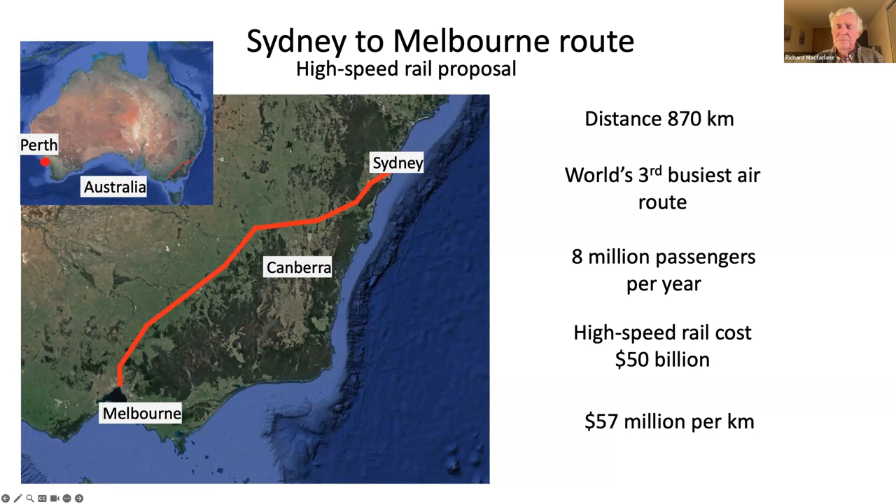And there have been a number of studies on this, and the high-speed rail cost is maybe 50 billion or 100 billion or something, but if we say 50 billion, that comes out at $57 million per kilometer for the route. And it's not a very challenging route. It's relatively flat; there's a few hills, but nothing too much. It's certainly been talked about a lot for high-speed rail, and I think it's a good candidate for Hyperloop. So for Hyperloop to be successful, it really has to be competitive with high-speed rail, or it will never be built.

High-speed rail, since Hyperloop's been announced, they built maybe 20,000 kilometers of high-speed rail. So that's the sort of standard. And look, I've been in design projects all my life, but everything that I ever worked on always had to have a place in the market. It had to have a market position, and it would ultimately sell. And that's what paid for the research.

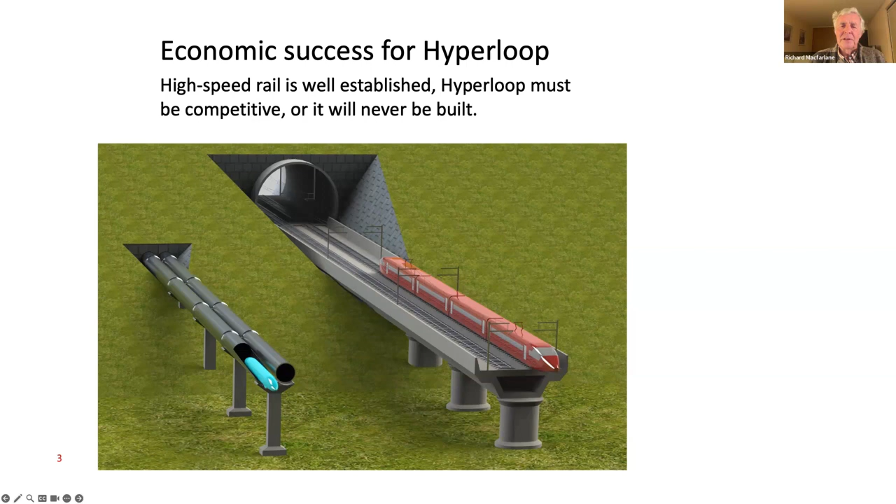And so my view of Hyperloop is that you've got to research towards the end product, which is a transportation system that will be built one day. So if we compare Hyperloop and high-speed rail, high-speed rail is an established technology, which is a real advantage. People know what it is, and it's popular, and it's compatible with existing lines and network. That's an advantage. And also with high-speed rail, it's very easy to have frequent stations, a lot of intermediate stations.

Hyperloop has the advantage, as we know, of very high speed and very low energy. So they're two big advantages. But the real question is the construction cost. And this is where we've really got to say, how can we build it in a way that's competitive with high-speed rail? And this affects every decision in the design process. And to me, it has to be the objective of the team, to say, how can we get this to work?

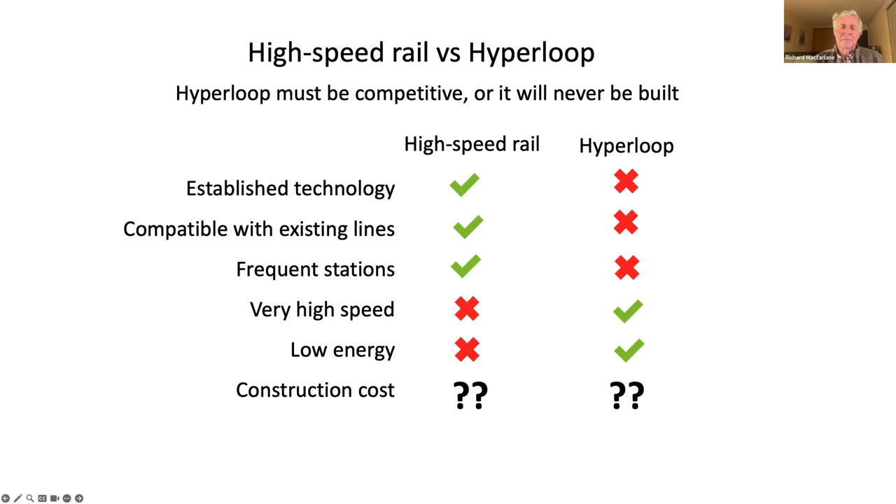So my proposal is a vacuum tube that's 2.8 meters inside, steel tube. The pod is 1.65 meters inside. That's about the same width as a minibus or a large car or a Learjet. And that's 3 seats side by side, rather more comfortable than the 3 seats you get in economy class in aircraft. So you get 27 seats in economy. And if people want to pay a bit more, you have 2 seats side by side, a bit more comfortable, and you get 18 seats in business class.

I think the speed has to be 600 kilometers an hour. And then, as you build up the technology, you'd be aiming for 1,000 kilometers an hour after a few years. And the vacuum, 10 millibar, I call it a 1% vacuum. So that's 1% of the air pressure, which is 99% less drag, which is pretty useful. So this is my concept for the pod.

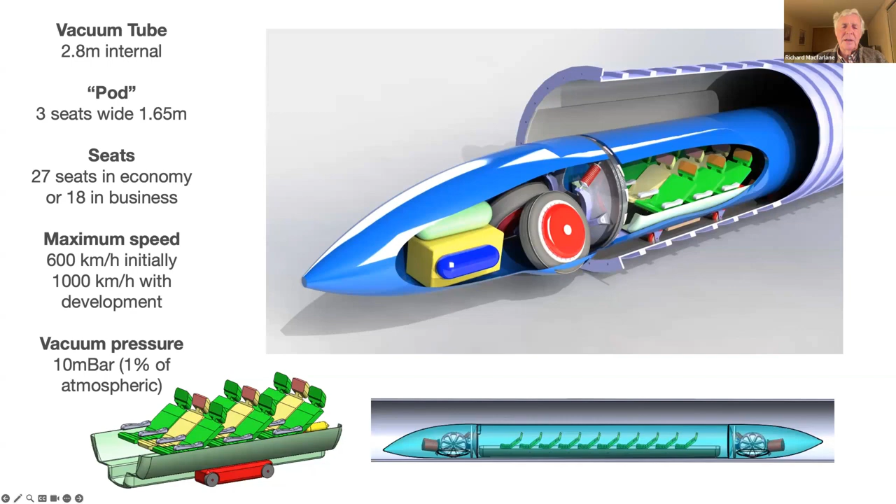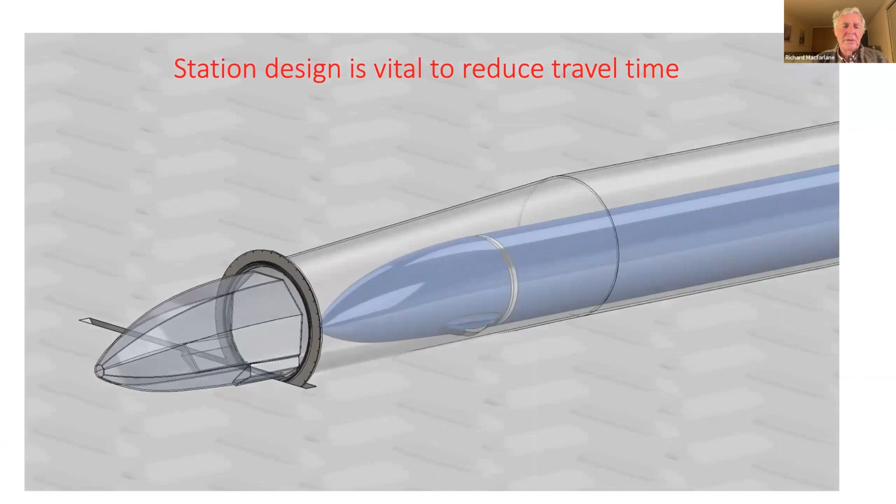And I'll just show you how the station works. The station's really important because we've got to have a quick turnaround. We've got to turn around the passengers really quickly, otherwise the service isn't really worthwhile. So the pod comes along inside the vacuum tube, and it goes up to the airlock there, and the airlock unscrews the power car and moves it over to one side. And then the seating module rolls out. And just notice that red thing is the clamp seal that clamps onto the pressure hull and then keeps the vacuum.

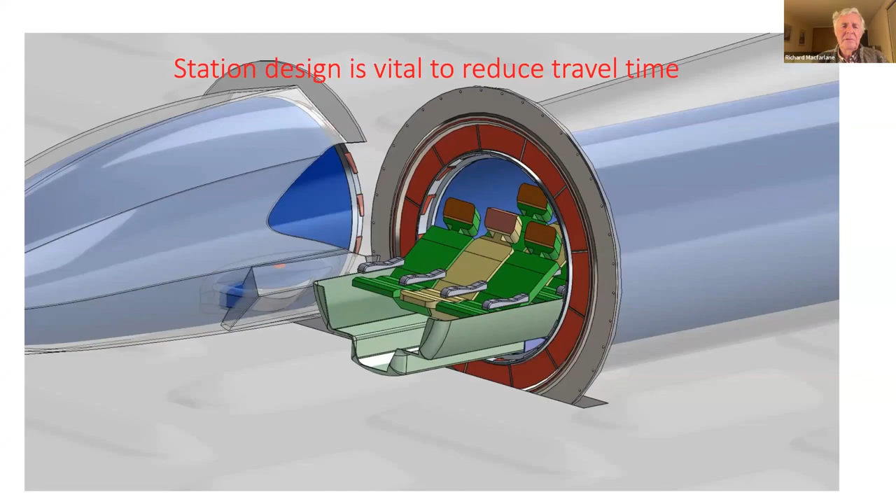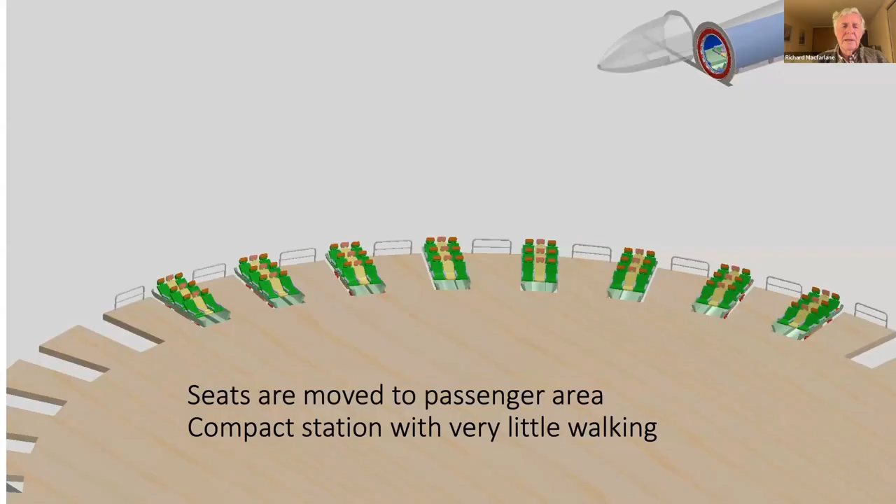And in this next one, we see how the seating modules roll out, and they're picked up by little autonomous trolleys that carry them over to the passenger area. And this next one here, there's a number of different ways of doing this. I've sort of shown it as a carousel. Basically, the seating modules come up to the passenger area, so the seats come to the passengers, so the passengers don't have to walk. And the passengers can then spend some time getting out of the seats and the new ones climbing in, but the pod actually turns around very quickly. So I think the total time for the pod would be about 1 minute at the airlock.

So it's interesting looking at this route here, 870 kilometers. The flight time is about the same as an aircraft, it's similar speed. But where we've really got to get the advantage is to get the station time down. I think including station time, we can probably do this trip in 70 minutes versus 3 hours for flying. And airports are terribly slow and they're generally a long way out of town. And I think high-speed rail would be about 3 hours as well, which means that in a way, it's hardly worth building high-speed rail because it's going to be no quicker than flying, you know?

But I think the objective of this is to combine the speed of an aircraft and the quick turnaround that you'd have at a metro station, like an underground station, where you're never more than a few minutes there. So I think this is the station that will work really well.

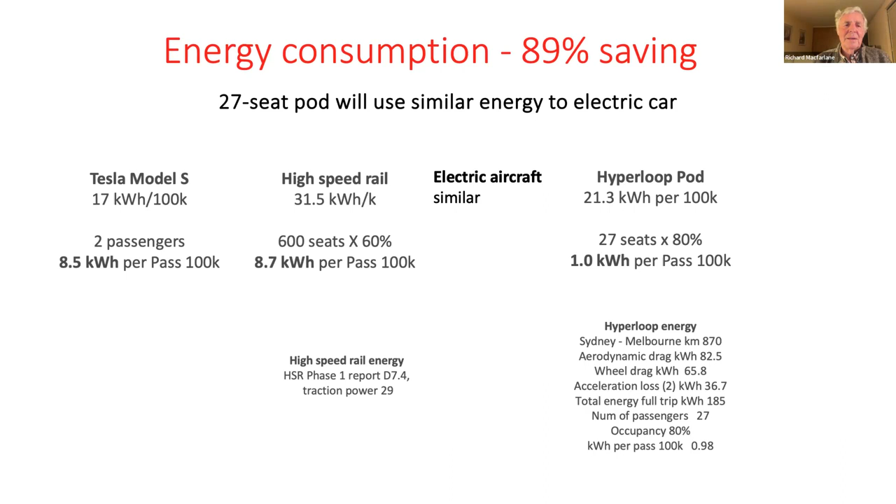And today's focus is all on energy and energy saving. So there's incredible savings from this, and it just shows the benefit of running in a vacuum. So now we get to the really important one. The difficult one is the construction cost.

We can see from this image here that the Hyperloop has to have these big, heavy steel tubes. But once you've paid for the tubes, and of course the tubes are a lot more expensive than the railway lines and things, once you have the tubes, it's really a much smaller project. And you can see that this is on flat land here.

And one of the big issues, and I think you mentioned it before, is landowner resistance or community resistance to a project. Nobody wants a high-speed rail going through their property or through their village. It's terribly noisy and dangerous. And the Hyperloop will be much, much more acceptable. It'll be completely safe and quiet and much easier to cross over or under it. So just on flat land, I think Hyperloop maybe has got an advantage.

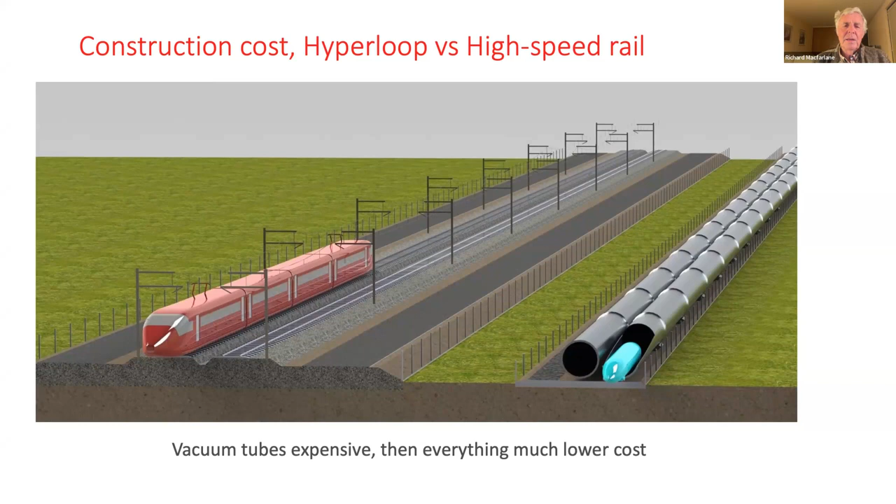But now we look at tunnels, and tunnels are incredibly expensive, and the surveys for this route indicate maybe 50 kilometers of tunnels, I think probably more, and they're extremely expensive. But you can look at the difference in size here. You can have twin tunnels with 1 tube in each, or maybe a better solution is 1 tunnel with 2 tubes in it. And the one I've shown there has got a little walkway underneath so that you can sort of walk along inside the tubes and do the maintenance and stuff.

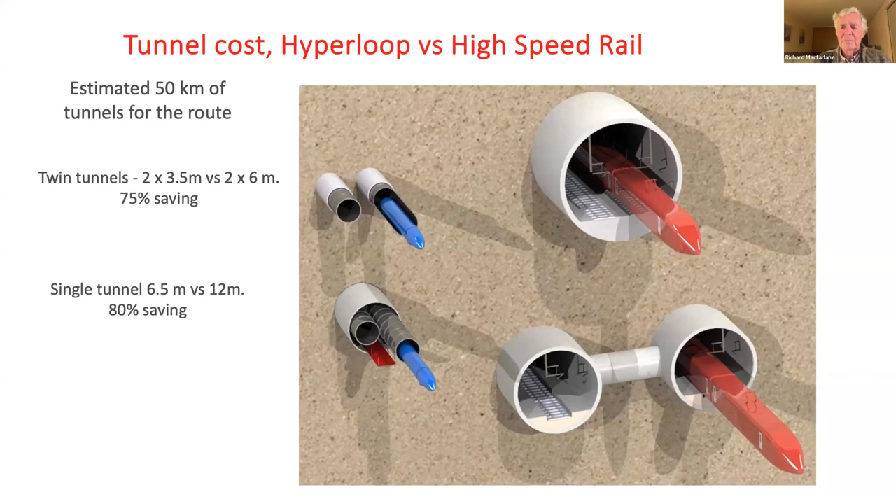But you compare the amount of material removal for the tunnel and the amount of concrete for the lining of the tunnel, and you're really looking at about a 75 or 80% saving in terms of tunnels, which is an enormous saving. And now we look at the elevated sections.

I think a lot of Hyperloop images show the tubes elevated all the way, and I think you wouldn't do that. You're obviously going to choose the cheapest option, whether it's putting it on the ground or underground or whatever. But when it is elevated, you can see the difference here. The steel tubes will span 25 meters just with a fairly light concrete pylon to support it. And if you're crossing a river or something, if you put the tubes one above the other, you can actually span up to about 50 meters, which is really useful.

But you can see here, railways are extremely heavy, trains are very heavy, and a lot of vibration. And you see you have to have a massive concrete structure for a railway. And again, you've probably got about an 80% saving in concrete compared with high-speed rail.

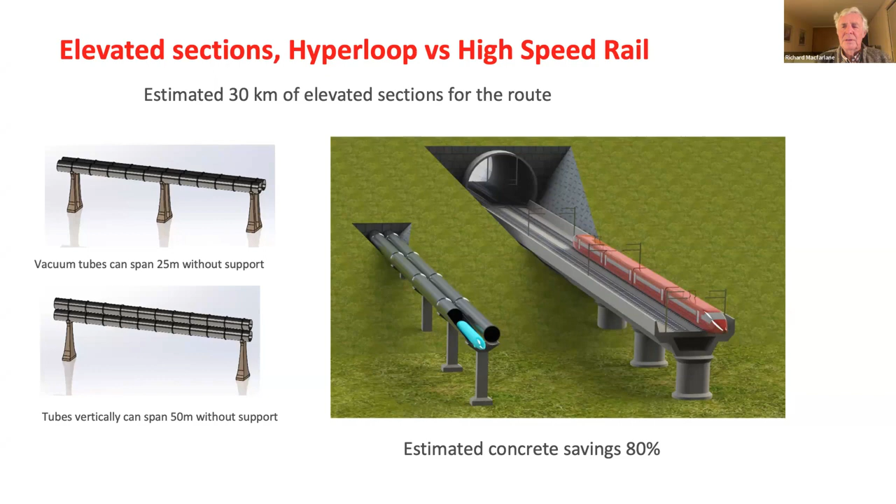So if we add it up now, the difficulty here is that it's almost impossible to get absolute costings for high-speed rail. And even on our project in Australia, every time they work out the cost, they get a different answer. But what we can do quite well is make a comparison between Hyperloop and high-speed rail. We can just look at the amount of concrete and the amount of steel and the amount of digging and whatever.

And you can see, comparing the Hyperloop pod there, the tubes and vacuum are going to cost a lot more than the rails, but then the extra costs on top are substantially less. And so I think that your Hyperloop will probably come in at a lower cost than high-speed rail, or certainly no more.

I've also shown there a Hyperloop configuration that probably is the most common one, a really quite wide pod with 6 seats and an aisle. It's about the same size as your A380, A320 aircraft. It sort of looks good and it's nice and comfortable and everything, but actually your vacuum tube now is costing 5 times as much as the smaller one.

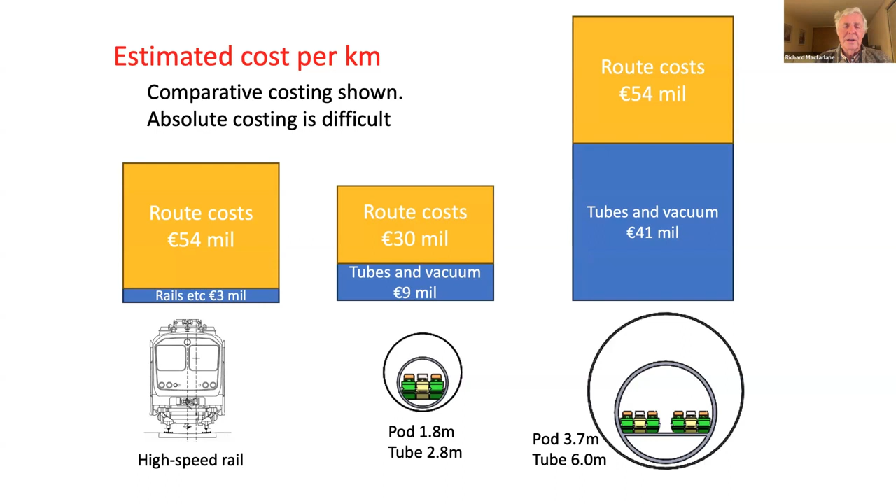The tube cost goes up as a square of the diameter, of course. And so you can see it's pushing the cost to be substantially more. And I think that's not the right way to go. Okay, we'll go to vacuum now.

So when Hyperloop's built, it will be the world's largest vacuum tank. And there's been a lot of people saying that it's going to take a year to pump it down and cost a fortune and everything, but it's absolutely fascinating and actually a lot of work to work out the real figures for the vacuum pumping. And I've been in contact with Busch in America, who make vacuum pumps, and obviously this is one of their

bigger ones. So for the 870 kilometer Sydney-Melbourne route, you need one of these pumps for every 5 kilometers of a pair of tubes. And so you need 180 pumps altogether for the whole trip. The total cost of the pumps is about 50 million, which is not a lot of money in the grand scheme of things. And it would then take 8 days to create the vacuum to bring it down to that 1% vacuum, as I call it, or 10 millibar vacuum.

And you can work out the amount of energy, and it's obviously a lot of energy. It's 950 megawatt hours to pump the vacuum down. But what's interesting is that if you compare that with high-speed rail, if you were to put all of the passengers on high-speed rail that currently fly, high-speed rail would be using about the same 900 megawatt hours every single day. So the cost of your vacuum pumping down, and you've really possibly only got to do it once, is actually minimal compared with the amount of energy that high-speed rail uses. And so they're just amazing figures. And as I say, quite a lot of work to calculate this out, but it's really exciting, the results.

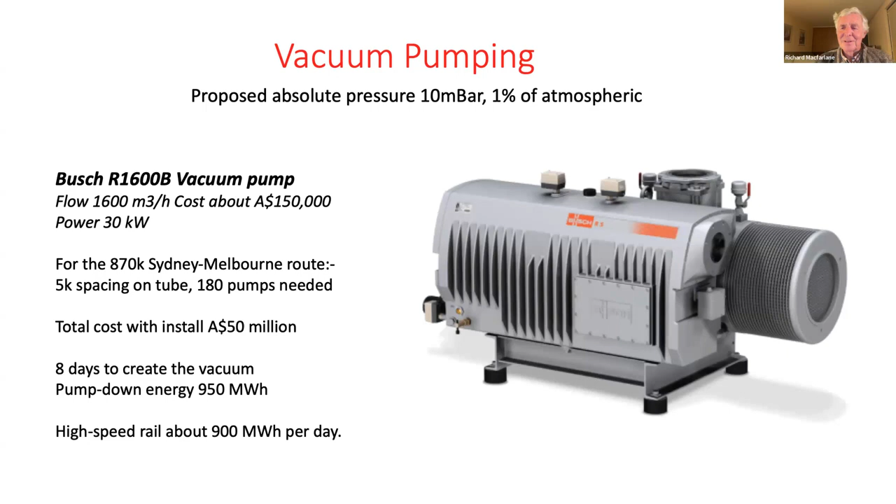And now cooling, really interesting. It's absolutely fundamental. Every power system has a certain inefficiency, and that creates heat. So in Hyperloop Alpha, he actually proposed using water for cooling, but he was then going to store the steam. And he had no idea of what to do with the steam. What do you do with it? And so my solution here is that at this 10 millibar pressure, water boils at 8 degrees Celsius. And water is a fantastic refrigerant at these low pressures. It's got very high heat of vaporization, so it's wonderful stuff.

And so my proposal here is that you use your waste heat and it boils the water, and then you just let the steam out into the tube. And after a while, the tube will become full of water vapor rather than air. And that's actually great because water vapor has got a lower molecular weight than air, and a higher speed of sound and less drag. So it's actually an advantage to have steam there. If it's really chilly outside, the water would simply condense on the outside of the tube and you pump it out. But if it's warmer than that, you'd have to have condensers on the outside.

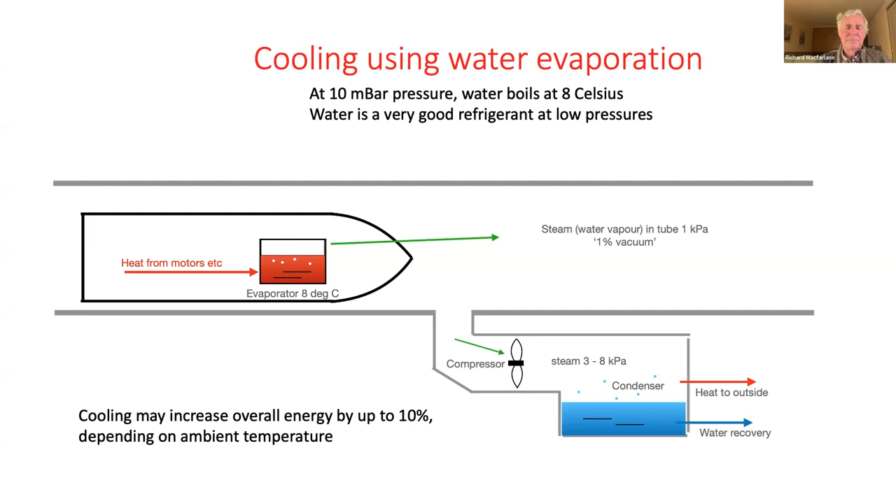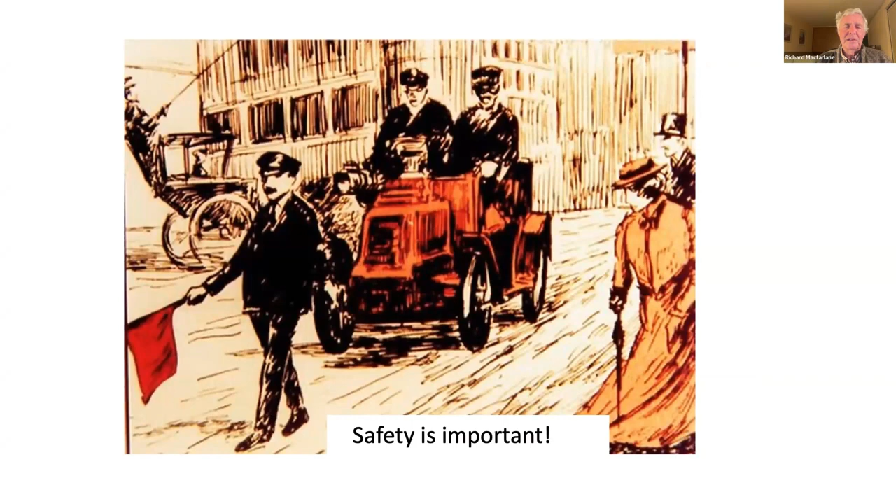And so just talking about safety, Hyperloop's basically safe, it's protected inside a steel tube and it can't fall out or fall over really. So it's relatively safe. But all of the safety challenges are completely new. They're all challenges that we haven't encountered before, and we've got to obviously take it very seriously. So I'm just going to quickly cover the main ones here.

Emergency braking. Standard braking will be regenerative braking using your power systems, and probably a maximum of about 0.3 G or 0.2 G or something, depending on how much power you have. Emergency braking, we can do it at 1 G, which is the same as your car. And so it's using friction brakes onto a steel rail in the bottom of the tube. And at 1 G, we'll be able to stop in about 3.2 kilometers. And if we send the pods out at 30-second intervals, which is what I think we can do, they're going to be 7.5 kilometers apart. And so we can actually stop in half the distance of the pod up ahead.

So you can't have a fire in a vacuum, which is good, but you can certainly have a battery that decides to overheat. And the solution there is to remember that we've got a power car at each end of the pod, identical. So if a battery decides to overheat, you just drop it in the tube and then drive away from it. And you've got a bit of a mess to clean up, but everybody's safe. And actually, I think that would be a wonderful solution for our electric cars that catch fire sometimes. I think you should just be able to drop your battery in the road and then go somewhere else, get away from it.

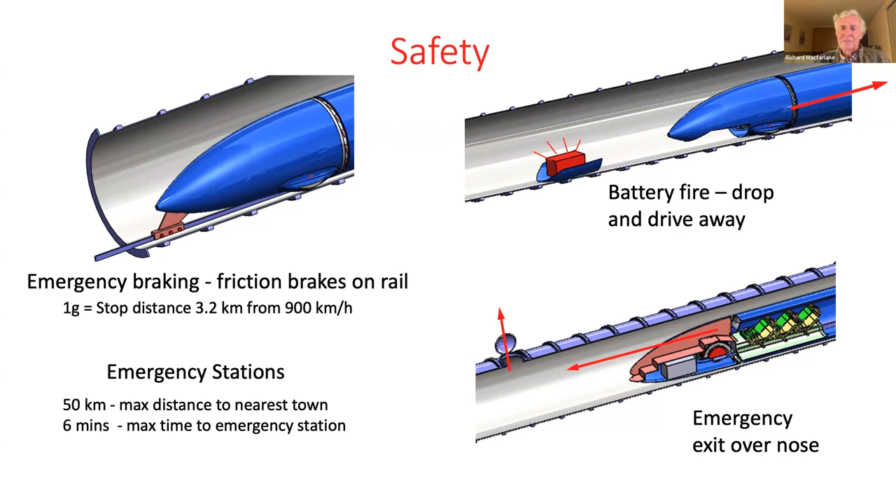Thanks a lot, Richard, for the interesting talk. Indeed, there are some questions, so I would suggest we just jump straight into them. Someone from the audience is asking first, why didn't you consider doors for your vehicle design? We have seen that the top part, the nose, is the one which is, let's say, releasing the passengers inside. What is the benefit from your smaller passenger cart compared to other concepts we have been seeing where air locking has been really on the door itself, not on the top?

Okay, well, I'll answer the first part first of all. The benefit of the small pod is that my pod is actually substantially bigger than Elon Musk's pod. His was tiny with 28 seats. So the real benefit of the smaller pod is just to reduce the cost of the tube, and otherwise the tube just gets simply too expensive. And as the pod gets smaller, you really can't move around inside it, and so you really can't have an aisle.

And talking about side doors, the reason why it takes half an hour to load an aircraft is that the doors in an aircraft are very small. And the reason they're small is that they're very complicated. It's a very difficult thing to safely seal a pressurized passenger compartment. And so the side doors, yes, you could do it, but very complicated and disastrous if they fail,

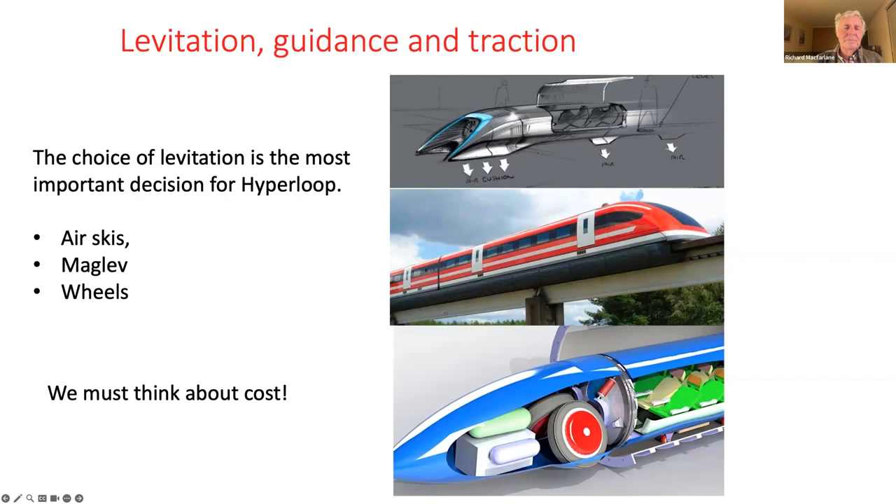I'll cover air skis first. There were air cushion trains in the 1960s. This followed on from the hovercraft inventions, and there were a number of these hover trains in different countries. And look, they worked really quite well. They achieved quite high speeds.

They really failed because they were using jet engines for traction. And jet engines are terribly inefficient at low speed and horrible things. And it's really from these that maglev really started: they tried to make linear motors instead to make these go along, and then they tried to get rid of the air and use maglev instead. So they worked, but they were not successful.

The Hyperloop air skis was the most extraordinary thing, and I've often wondered how it ever happened, and I think I've worked it out. I think Elon Musk's original plan was that it was actually running in tunnels in atmospheric pressure. And it's quite logical if you're running in atmospheric pressure in a small tunnel to suck the air in at the front of it and then blow it out underneath. And it would have worked.

And then I think Hyperloop evolved; somebody said, oh, look, why don't we pump the air out? And the problem is that if you pump out 99% of the air, you also get rid of 99% of the lift. And this is quite a simple calculation. I did it within a few weeks of seeing Hyperloop. And it was perfectly obvious that air skis were never going to work, but people put a lot of effort into it, but it was sort of doomed, I think.

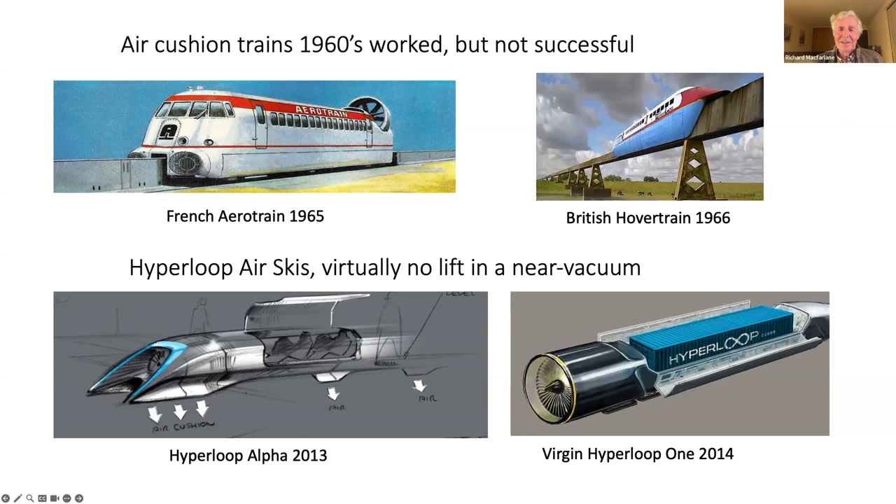So I'll just talk about maglev. Maglev's amazing. Probably the most beautiful one is this superconducting maglev in Japan. It's been an ongoing project for 60 years, and has never achieved any commercial success and has never carried a paying passenger. It uses superconducting magnets. They're cooled with liquid helium down to just a few degrees above absolute zero. Very high speed. It's done up to 600 kilometers an hour, and very complex and expensive.

And I went to see this. I couldn't get to ride on it, but I went to see it in Japan a few years ago. What an impressive project. Absolutely fantastic.

Another more recent project is Inductrack. And this uses induced magnetism into a non-powered rail. The rail's got sort of coils in it, but it's not powered. But it's only ever been tested at low speed. And I don't know why they gave up, but they had oscillation problems.

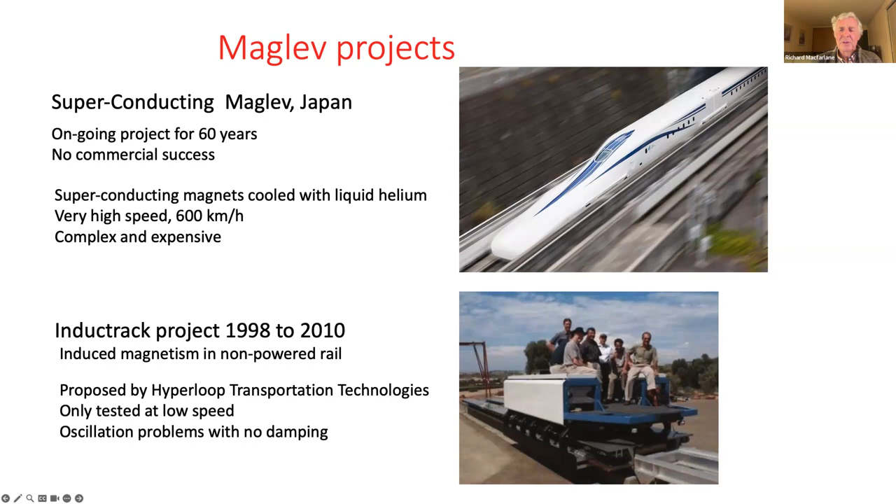And one of the problems with maglev is that there's no damping. And so you can get these oscillations. The mechanical system always had a certain amount of friction. And they had problems with vertical oscillations, but whether that was why the project stopped, I'm not sure. But Hyperloop Transportation Technologies is proposing to use this, but I don't think they've built anything or tested anything with it.

And then Virgin Hyperloop One started in 2014 and disappeared last year. I think they let go their staff. They claim to have had funding of $400 million, and that is an incredible amount of money. And I don't know where it all went. And you might correct me on this, I'm sure somebody there will know more about it than I do, but I think they were using eddy current maglev.

And so it's quite a low cost track, which is quite appealing. It's just an aluminium rail. It's appealing because it's low cost for the track, but it's also very high drag. It's like going up a steep hill all the time. And you can see here, and this is a picture that I think they didn't want to show the world, this enormous wheeled pusher, 3,500 kilowatts, that pushes this thing along to overcome the drag.

And they did achieve 380 kilometers an hour. And I think that's slower than some of the student teams, but they're a bit of a sad project really with all that money there.

And the project that's been a little bit more successful is the Transrapid in Shanghai, China. Look, it is in service. It's an operating passenger service. If any of you guys are in that part of the world, have a ride on it. I haven't. I'd love to. But it was designed by the German Transrapid company.

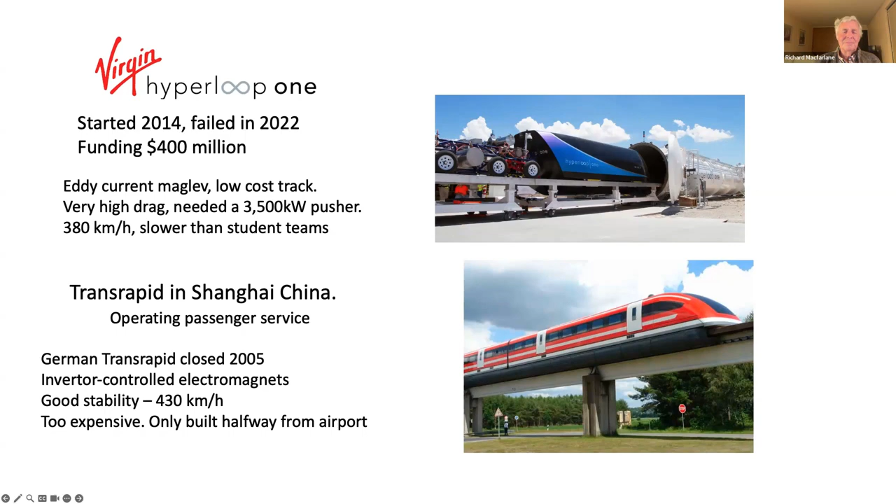I'm going to talk a bit about traction efficiency. With a high-speed system, you've got a real problem with traction losses, because when you start the journey, you've got to accelerate up to a very high speed. You've got to put in an enormous amount of energy to get up to speed. And then obviously you lose energy doing that, and then you lose a certain amount of energy while you're cruising, and then you've got your regenerative braking at the end of it, and you get your losses again. So whatever traction losses you have, they count twice. You get them twice with a high-speed system.

And so linear motors, you have a long stator that has coils the full length of the route. And I know the Swiss Loop one is doing their traction rather differently, but I guess I'm describing here the more classic linear motor. And one of the problems with any magnet system is the air gap. You need a large air gap for a linear motor, because the vehicle is bouncing around and you need to have good clearance for it. And so that large air gap reduces the efficiency.

And the other problem is that our modern electric motors are incredibly efficient, but they use all sorts of exotic materials and very fine tolerances and rare earths and things for the efficient motors. But if you put that stator along the full length of the route, you really just can't use these fancy materials. You've just got to keep it really simple. And so linear motors may have 2 or 3 times the losses of modern electric motors.

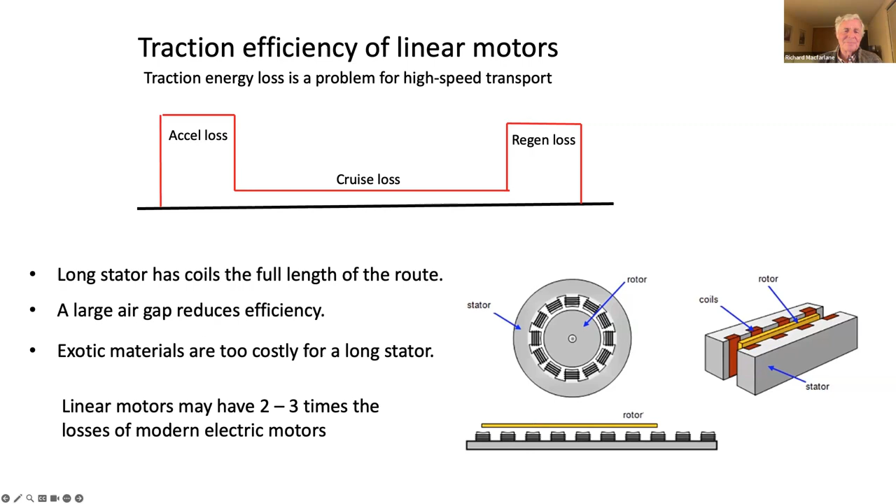So maglev, it's a wonderful technology, and I think it's got real purpose, very fast acceleration and very precise positioning as well. And the Transrapid and the superconducting maglev projects show that high speeds are definitely possible, but high construction costs and excess energy consumption have prevented these projects from being successful. So with Hyperloop, we've already got very high costs with our steel vacuum tubes, and we really can't afford to put a lot of extra cost in there. We need a lower cost solution for the levitation.

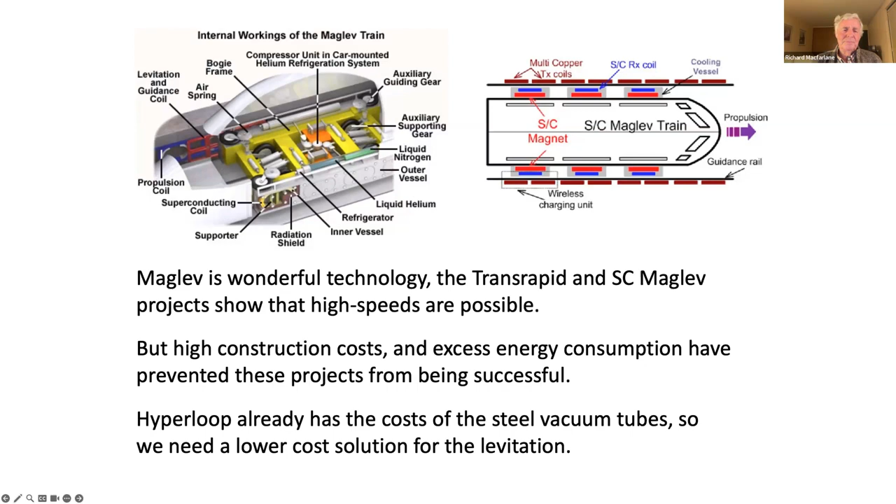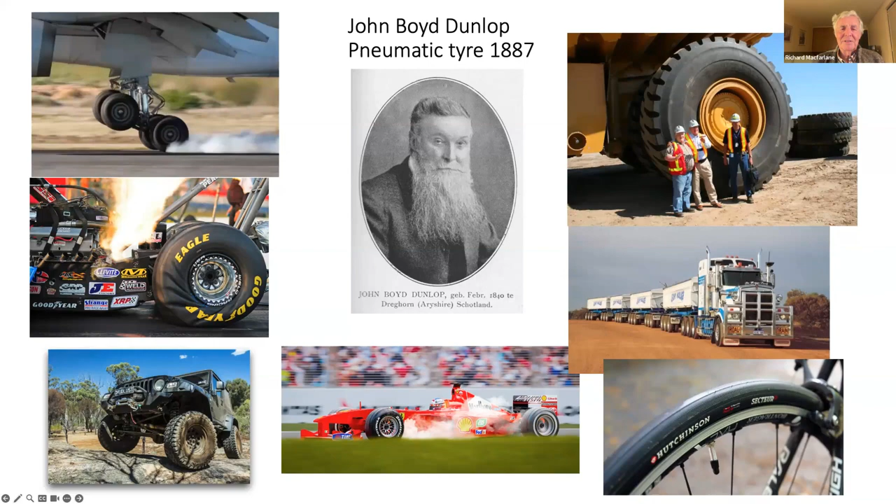But what's funny about pneumatic tires, we use them every day, and most people wouldn't even regard them as being a technology. But it's actually an incredibly successful invention. It can give a soft ride on any surface, and good grip and very low rolling resistance. So one of the purposes, obviously, of pneumatic tires is for motorsport, and in this case, land speed records.

Most amazing car. The wheel-driven cars, really, they're getting up to close to 800 kilometers an hour. But the salt lakes are very loose, and there's simply not enough grip on the rough surface to overcome the massive amount of wind resistance at that speed. But the car that did achieve 1,000 kilometers an hour is a rocket car called Blue Flame that got to 1,000 kilometers an hour in 1970.

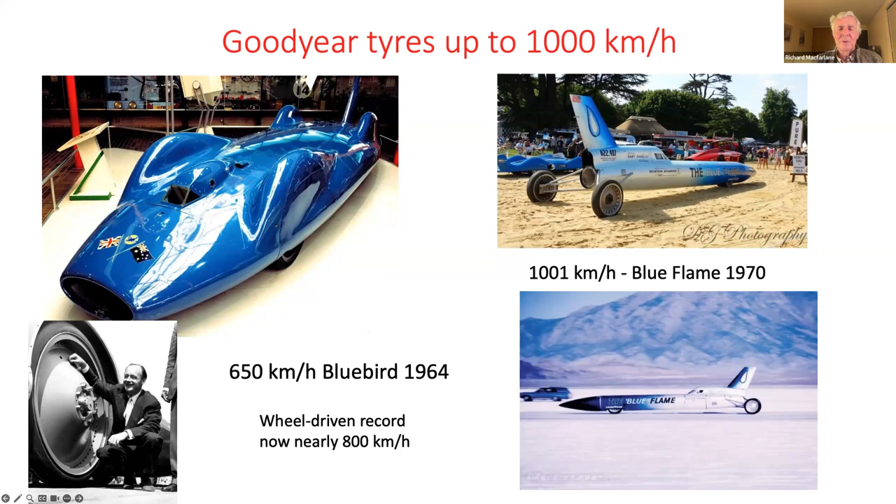And it's amazing. It was done with a very limited budget and obviously on the very rough surface of the Salt Lake. I've made contact with Dick Keller, who designed the car, and inquired about the tires. And he said they did a lot of runs to build up, sort of slowly building up to the speed. And they had absolutely no trouble with failures of the tires or with wear. So that's an amazing car.

So in 2016, I went to the first Hyperloop pod design weekend, I think it was called, in Texas. And I had a stand there and I was showing off my wheels. And everybody else had air skis and maglev and things, and they were sort of laughing about this old guy there with his old-fashioned wheels.

But at the end of it, Elon Musk gave a talk, and somebody asked him, did he prefer air skis or maglev? And he says, look, keep it simple. And he came up with the most fabulous quote, and this is from a man who does achieve miracles. He says, limit the number of miracles in series. Keep it simple. And he recommended wheels. And I felt a bit happier about that.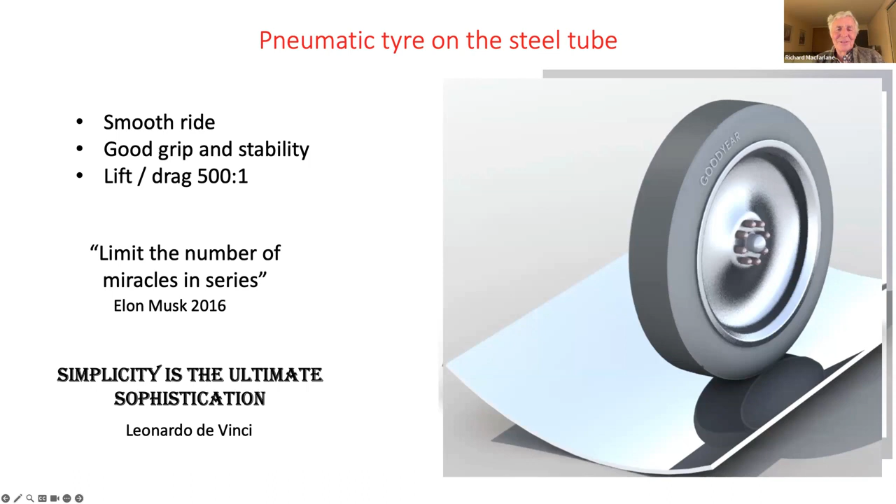So talking about the tire construction, steel wheels would not be suitable at this speed. They would work for a little while, but the fatigue cracks would make them fail really quite quickly. The pneumatic tire is absolutely ideal for this, and it really shows you the beauty of the technology. The main structural element is air, and the casing of the tire spreads the loads really evenly around the wheel. And so there's no peak loads at all.

The main stress is the hoop stress around the tread, around the outside. It's a bit like a cylinder with very high pressure inside it, but the stress is quite manageable. And then the sidewalls have a radial stress, which is a bit less. So when we talk about materials, the tires on your car are made of polyester, and these days they have a steel belt around the outside.

The tires on Blue Flame at 1,000 kilometers an hour were actually spin tested at 1,350 kilometers an hour before they were put on the car. They were made of polyester, which was the only material they had in those days. So a polyester tire would run at 1,000 kilometers an hour, but I think it's much better to use Kevlar or carbon, which are sort of 5 or 10 times better. And a much stronger construction is filament winding. You can make a much stronger tire with filament winding, but it would add to the cost, and maybe it's not necessary.

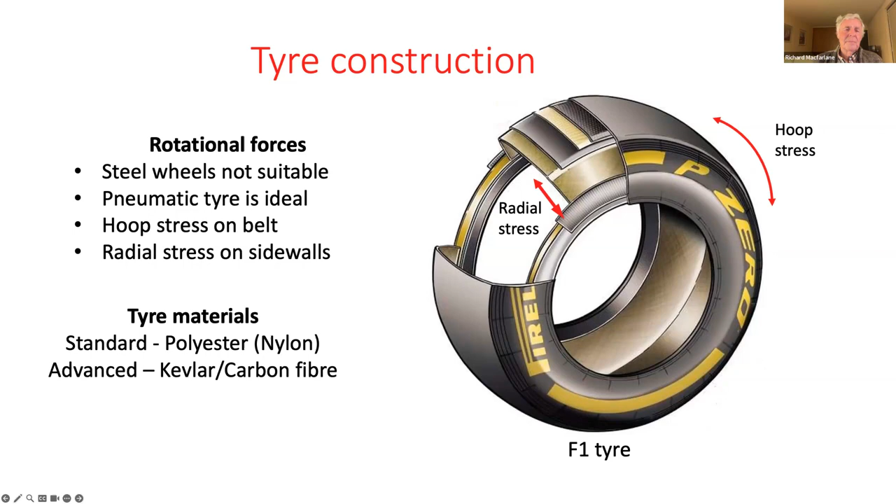So one real advantage of running inside the tube is the bank angle. When an aircraft goes around a curve, it banks and adopts the right angle so the passengers feel upright. And we can do the same thing with Hyperloop. What this means is that if you're planning out a route, we can have the same curve radii as high-speed rail, which is a real benefit, because if you have to have bigger curves, it increases the cost of your route.

And so with good passenger comfort, when you bank like this, you just feel a little bit heavier, which is okay if you're reclining in your seat. Railways and maglev have the problem that they can't adjust their angle of bank, and so they've got more problems with cornering.

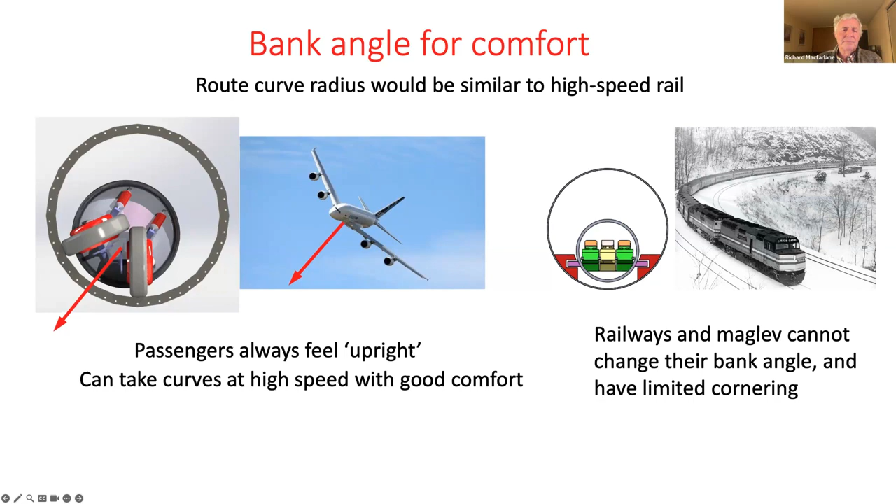So this would be a lovely research project for people who are interested. This is a dynamometer test rig for wheels. It's running in a vacuum tank, and you can use it for testing the tires, of course, and the surface that you're running on. You can test your vacuum systems, your motors in a vacuum, and your cooling for the motors. So you can do all of this at relatively low cost without going anywhere.

And you can find out exactly what the wheels are going to do at speed. This would be a lovely research project. And to get it started, there are certain stock tires. Mickey Thompson makes land speed tires rated at 950 kilometers an hour.

So you can buy those off the shelf and test them. And Goodyear made land racing tires as well. But I've also put in there a bike tire. And I think that your sort of very fancy bike tires are made of Kevlar, and they've got very thin rubber, and they're very, very thin, flexible tires. They've got extremely good rolling resistance.

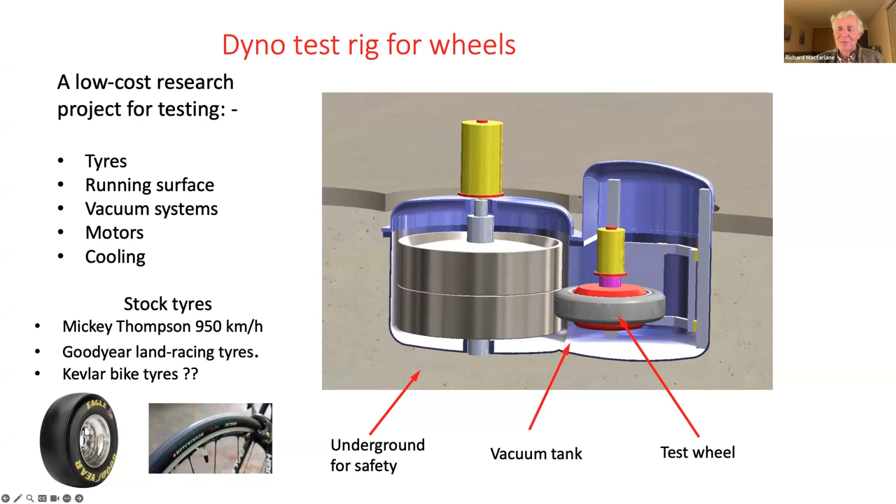Bike tires are about 450 to 1 rolling resistance. And I've got a suspicion that a bike tire has probably got a higher speed potential than anything else, but I'm only guessing. It would be lovely to test it, wouldn't it? And the big question, of course, is tire life. In cars, the life of our tires is 50,000 kilometers, and trucks are normally about 200,000 kilometers.

But we're running on a very abrasive surface. It's made out of crushed rocks, and intentionally abrasive to get better grip. And our tires are optimized for low cost. I mean, they're very cheap, and they use the cheapest materials. And they're also optimized for wet grip. And so you have the tread pattern and then the particular type of rubber. So your car tires are optimized for grip rather than life.

Your Hyperloop tires would be running against a smooth surface. And we don't need grip. We need maybe 0.3 G of grip for acceleration, no cornering forces. And I'm really interested in lubrication. You could actually make a tire that would never wear out. If you coated the bottom of the tube with oil, the tire is not actually in contact with the tube.

It's like the metal parts in your engine. It's all metal to metal, and then they're not actually touching one another, and they never wear out. And so with some sort of lubrication, you could really increase the life of your tires. Obviously, you're reducing the grip as well, but maybe there's a balance where you can get something that reduces the grip down to what you need and then increases the life.

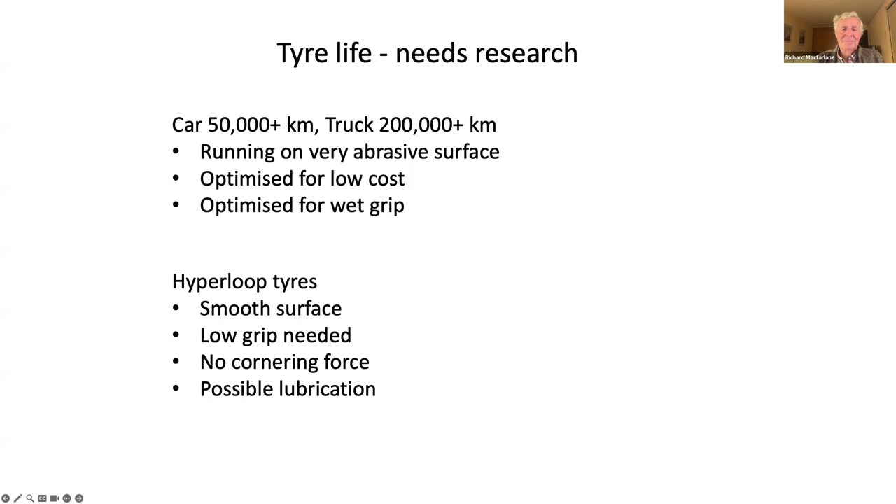So, but tire life, look, we don't know. We've got nothing to base it on, and it just needs testing. Okay, now we'll talk about the power car, and there's one of these at each end of the pod, and they're screwed on with a special thread onto the pressure hull. The pressure hull is just a simple carbon fiber tube, and the seats roll in and out of it.

And so there's a few different ways to do this. The way that I've shown here is that to give us the energy we need to complete the trip, I'd be putting in a hydrogen system. It's a bit like the Toyota Mirai hydrogen car with a fuel cell. And something of that same power would actually give you enough ongoing energy to complete your journey.

The problem is that you need a massive amount of energy to accelerate up to full speed. And then hopefully you get most of that back when you brake afterwards. And so you actually need, well, I've shown here a lithium battery of 100 kilowatt hours, which is rather bigger than in an EV. So a lithium battery would do it. But a supercapacitor would be much better if they're available, and maybe there will be one day.

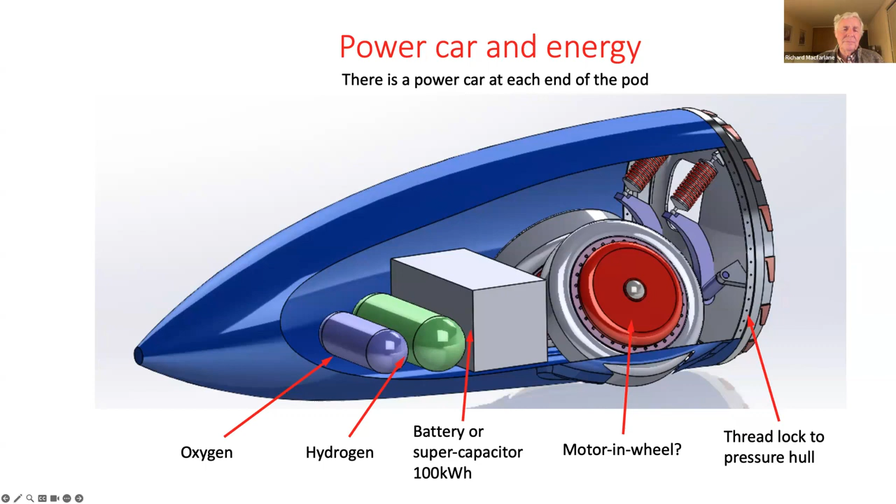So, is this the best solution? So we have the minimum cost steel vacuum tube. There is nothing extra in the tube. There's no coils, no rails, no magnets, nothing. This project, if built like this, is cost competitive against high-speed rail. Now the tube's obviously a very expensive part, but we don't ever need to change the tube. There's nothing in it. We don't need to change it.

What we can do is to develop the pod and the wheel designs to get better and better performance. So the pod can evolve. So it's a bit like what happens on our roads. The road doesn't change, but our vehicles get better and better. So the most expensive part, which is the tube, we build it and we don't have to change it, and then we can work on the pod. So is this the best solution? I'm not sure. Be interested in your comments. So thank you.

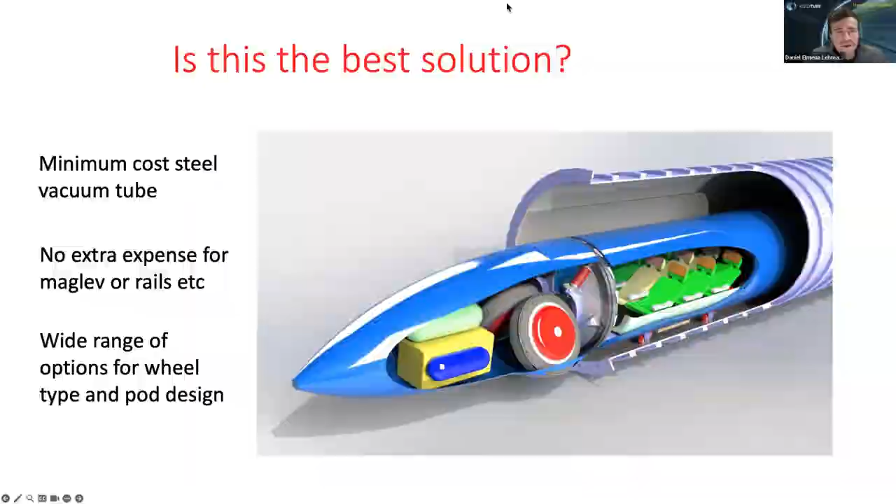On this note, about the slide you showed at the very end, someone is asking: if you are using wheels, all the propulsion unit, all this weight would be added to the pod, because with a magnetic levitation system the propulsion would be on the track side. So this is a weight you are not loading onto the pod, but instead moving to the track. Have you looked into how much of an effect this would have in terms of weight for the pod vehicle? Because going at such speeds, this would have an effect on the tires as well, right?

Yeah, look, I don't think there's a lot of weight. I've shown a lithium battery there, a 100 kilowatt hour lithium battery that's quite heavy. I think there's better solutions than that. But I don't think there's a lot of extra weight for the propulsion. And the main thing is that we're just not spending the money on putting stuff in the tube.